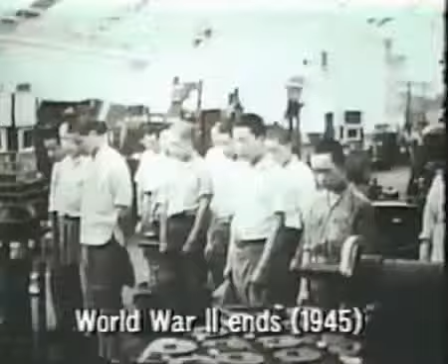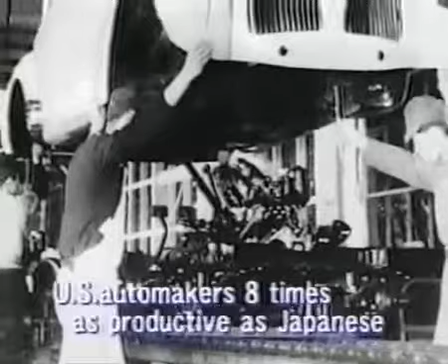After the war, Kiichiro passed on his dream to his cousin Eiji. He instructed Eiji to bring the company up to U.S. standards of technology within 3 years. That was a daunting task. U.S. productivity in automobile manufacturing was 8 times higher than Japan's, and Toyota was short of equipment and capital.

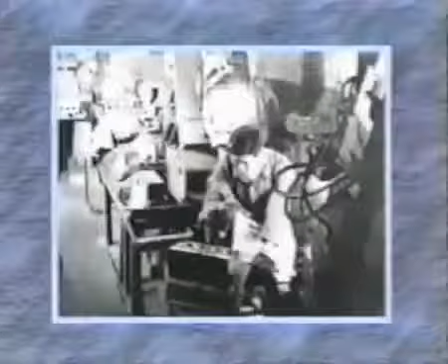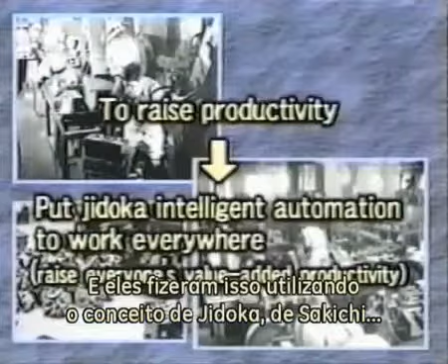So raising productivity was a pressing issue. Eiji assigned a machine shop manager by the name of Taiichi Ohno to develop a more efficient production system. The two men looked for ways to raise the value-added productivity of every worker. They did that by putting Sakichi's Jidoka concept to work throughout their operations.

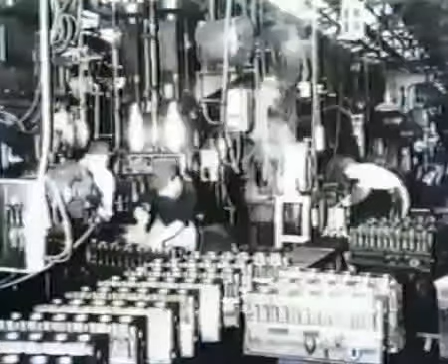They also looked for other ways to stretch their limited resources of equipment and capital. They did that by putting Kiichiro's just-in-time concept to work systematically. Ohno took a cue from the U.S. supermarket. He made each process the customer for the preceding process.

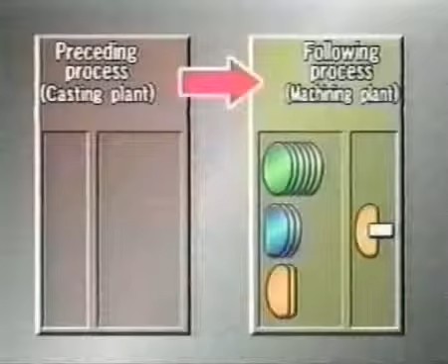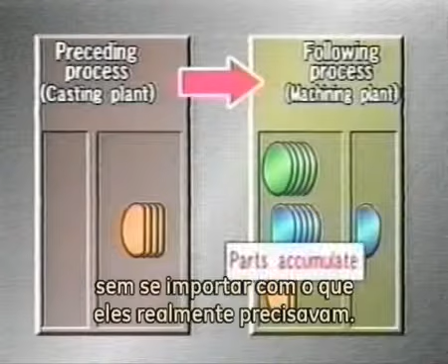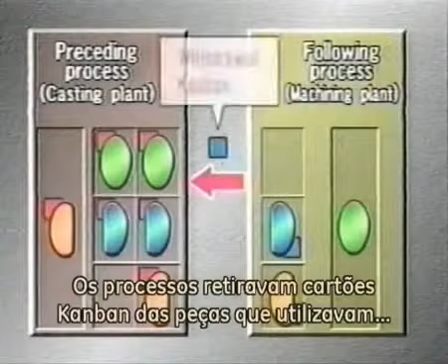In traditional manufacturing, processes delivered parts to the following processes regardless of what was actually needed. Ohno devised a completely new kind of system. Processes used Kanban cards removed from parts they had consumed to withdraw parts from the preceding processes.

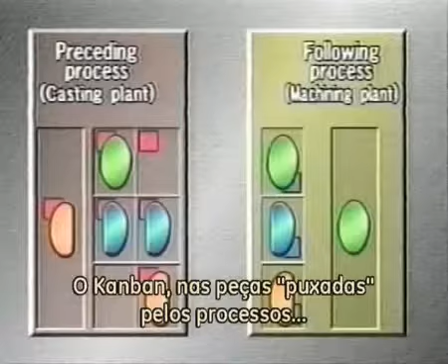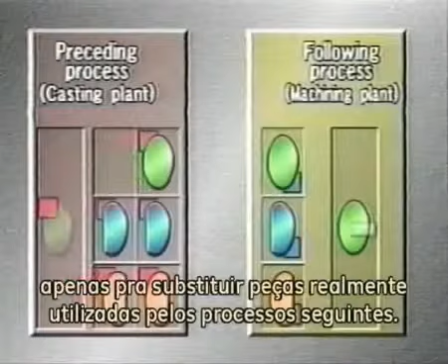Kanban on the parts arrayed by processes came off when the following processes withdrew the parts. They became instructions to make additional parts. The Kanban flow ensured that processes made parts only to replace parts actually consumed by the following processes.

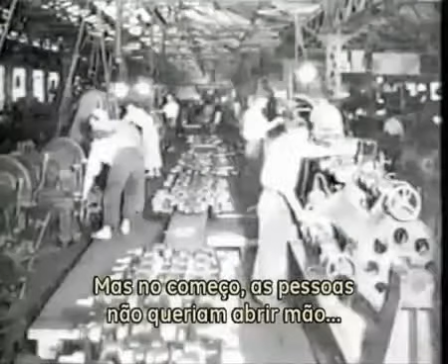Active cooperation by the people in the workplace would be essential to Ohno's system. But at first, people were reluctant to give up their old ways of doing things. Ohno took the initiative. He went into the workplace and taught people how to use his system. Eiji Toyota supported Ohno enthusiastically in putting the new production system in place.

A new production system gradually took shape on the foundation of just-in-time manufacturing and Jidoka intelligent automation. As the Toyota production system, it became a standard for manufacturing industries. The Toyota production system gained global attention after the oil crisis of 1973. Toyota recovered more quickly than other automakers from the crisis, and its production system received much of the credit for that resilience.

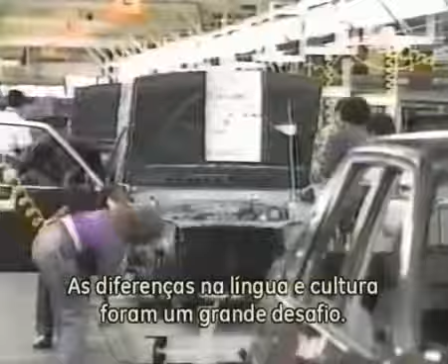General Motors Corporation approached Toyota about setting up a joint venture to make small cars in the United States. The two companies set up New United Motor Manufacturing Incorporated in California in 1984. Differences in language and culture presented big challenges, but the spirit of making things well knows no borders.

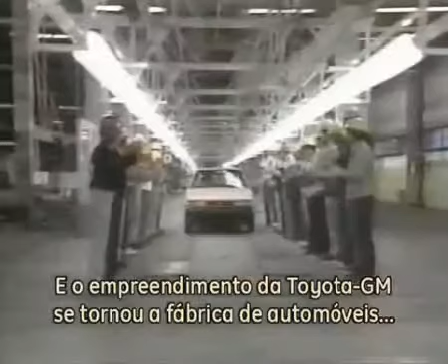People accepted the Toyota production system, and the Toyota-GM joint venture became the highest-ranked automobile plant in the United States for quality. It became a symbol of successful industrial cooperation between Japan and the United States. A book published by the Massachusetts Institute of Technology hailed the Toyota production system as the machine that changed the world.

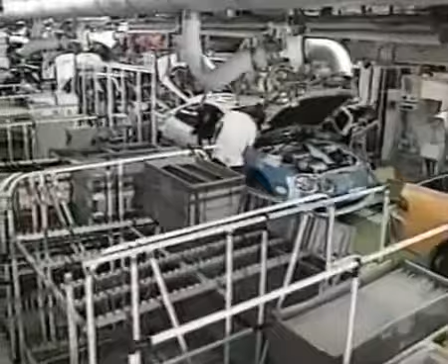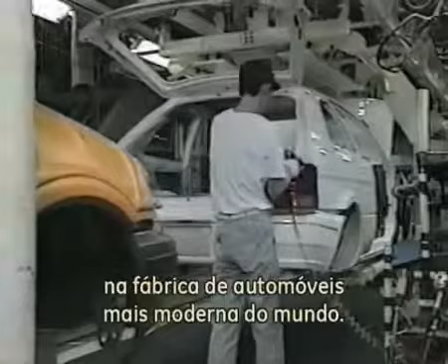Today, the Toyota production system has gained a worldwide following. Let's see how the system now operates in the world's most modern automobile plants. The trucks that deliver parts to the plants carry a variety of items in each load. That allows each truck to travel fully loaded, which minimizes trips and thus reduces traffic congestion.

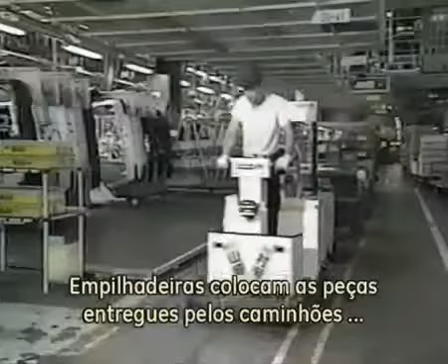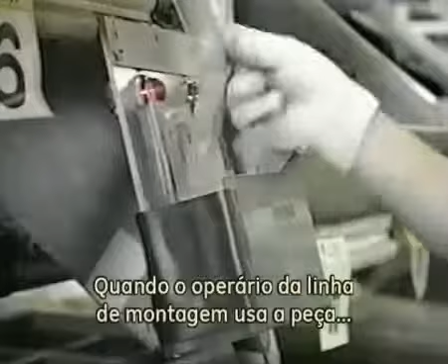Forklifts carry the parts unloaded from the delivery trucks to racks alongside the assembly lines. When people on the assembly line use the parts, they remove the attached Kanban cards. The Kanban get picked up regularly and sorted. The delivery truck drivers pick up the Kanban for their company or companies before leaving.

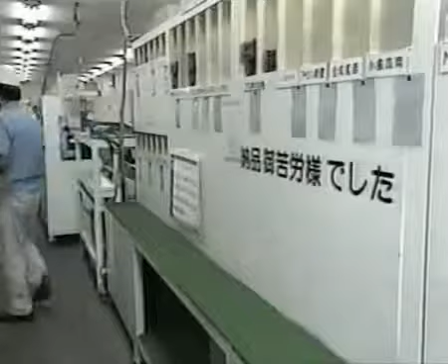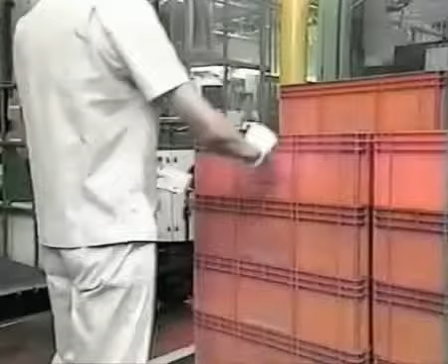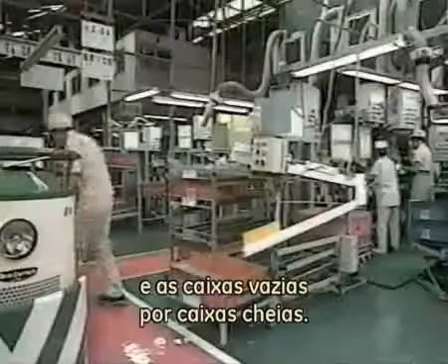Back at the supplier's plants, the Kanban become orders for withdrawing additional parts. Sorting arranges the Kanban according to area in the plant. Shipping personnel exchange the Kanban and empty boxes for full boxes. The production processes in the plant make additional parts only to replace parts that have been withdrawn. That prevents the wasteful buildup of inventories.

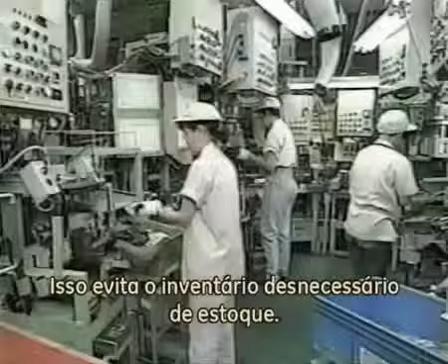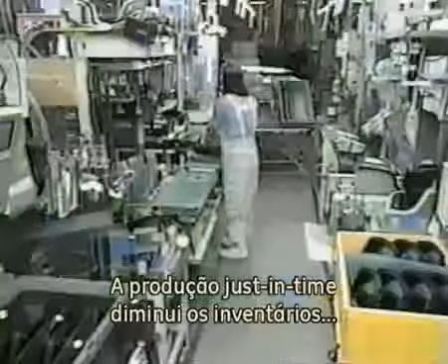When the shipping personnel have gathered a full truckload of parts, a truck carries the parts to the vehicle plant. Kanban thus link Toyota plants with suppliers' plants, as well as linking the processes inside the Toyota plants. Just-in-time manufacturing minimizes inventories, eliminates waste, and maximizes productivity at all the plants that participate in the Toyota production system.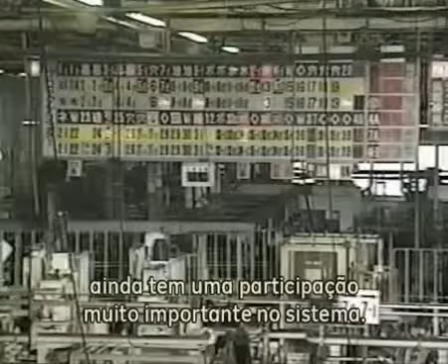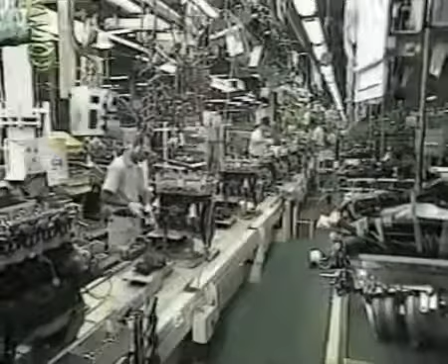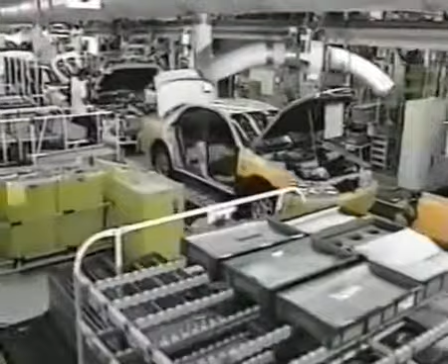Jidoka intelligent automation also continues to play a big role in the system. On automated machining lines, numbered lamps light up to call attention immediately to any problems detected by sensors. On assembly lines, the employees themselves have devised countless Jidoka measures to prevent defective work. So Sakichi's concept continues to prevent waste. The idea is to build quality assurance into every process, and it works.

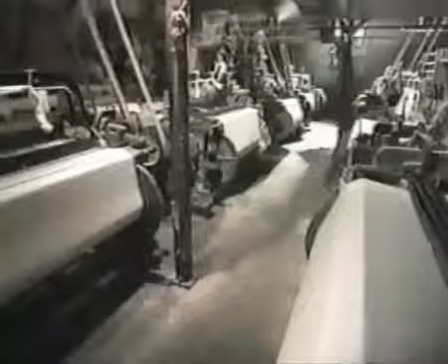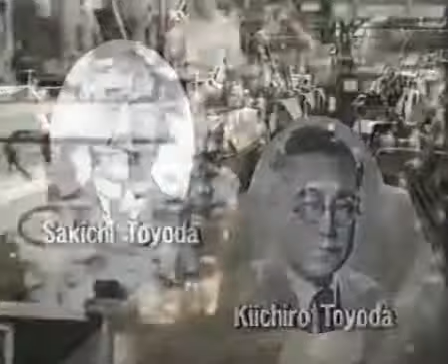The foundation for the Toyota production system has been established by Sakichi's Jidoka intelligent automation and his son Kiichiro's just-in-time manufacturing. Taiichi Ohno and others put those concepts to work systematically with the strong support of Eiji Toyota and his passion for manufacturing.

The Toyota production system continues to evolve in response to changing needs and circumstances, but the fundamental concepts are eternal, including Toyota's commitment to continuing improvement in every phase of products and operations. Those concepts underlie a lasting contribution to enhancing the quality of life for people everywhere.